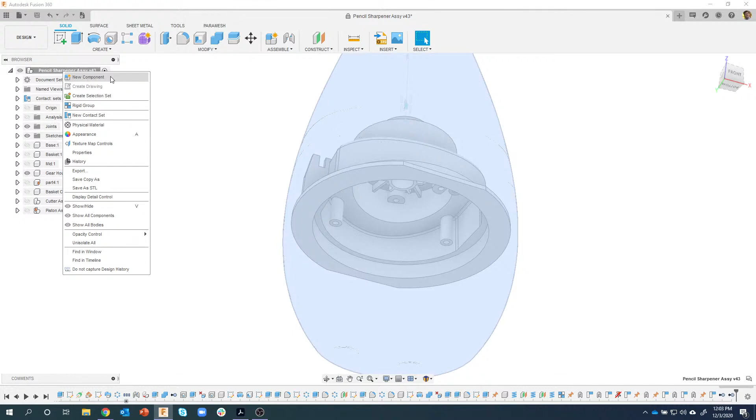We're going to be using information from this, but I want to create a new component. One of the easy ways to do this is to right mouse click in your browser and say new component, and you're going to see me do this a lot today. I like this method because you can tell it where you want that component to go. If I came up here and said new component, I'd have to tell it what's its parent and all this kind of stuff, which can get a little confusing.

So I'm going to just right mouse click here, say new component, and I'm just going to call this motor gear base.

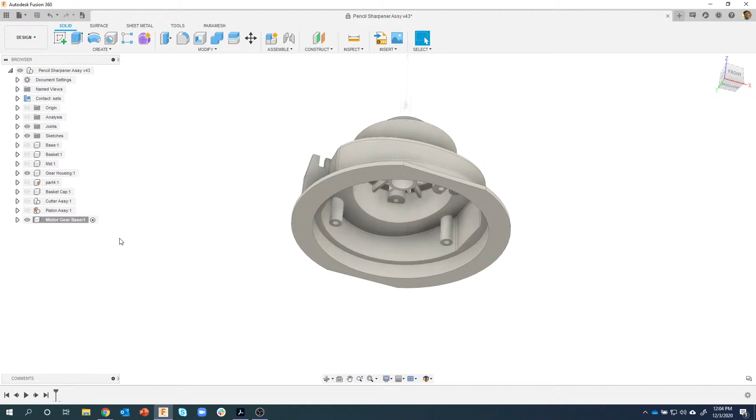Okay, so I now have this component called motor gear base. You can see that it's active, which is great. And then I'm going to create a sketch.

This part kind of butts up against this other gear housing right here, so I'm going to put my sketch right on that face and project - I'll hit P for project. I like to rotate so I can see which edge - there's an edge here and there's an edge here. Does it really matter? Not really, but if I'm looking at it straight on, I have a harder time seeing which edge I'm actually selecting. So I like to rotate slightly, and we're going to project that edge right there. Just a little tip I do.

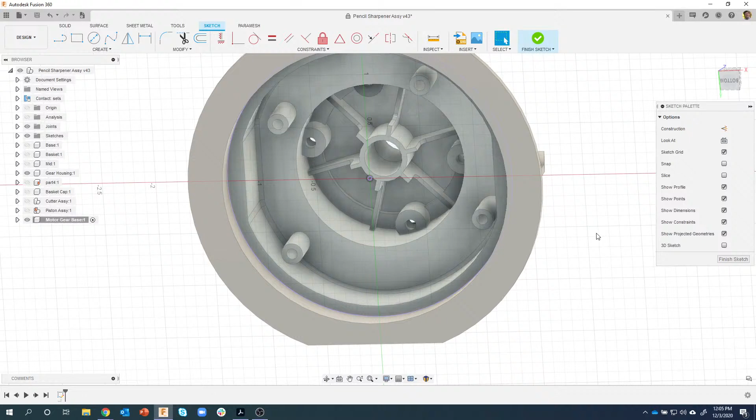Don't need the gear housing in the way anymore. And I now have the edge projected from that gear housing.

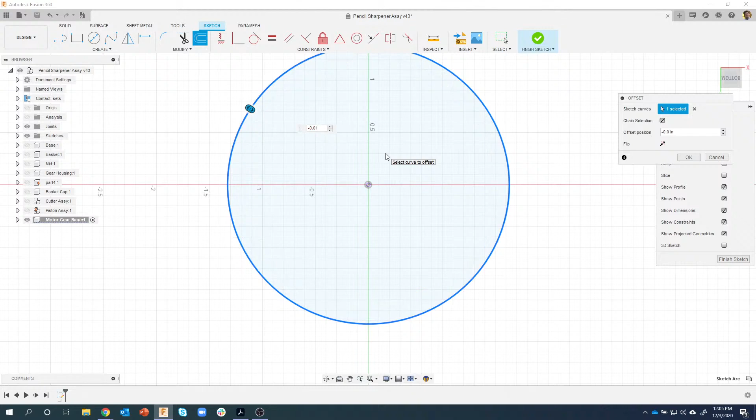We're going to give it a little bit of clearance, so I'm going to use the offset command - the shortcut key is O for offset. I'll click on that edge and drag to see it go in, which is a negative number. That's why I like to drag first, to make sure I put in a negative 0.01. If we zoom up, you'll see there's the projected edge, and there's our new offset edge.

Let's do a circle on this new edge. You'll notice it's going to try to snap to that edge, so I'll get close to that. I want it right here, but since it's not snapping horizontal, I like to over-exaggerate a little, so I'll come up a bit. This is going to be a 0.5 diameter circle, and we can see it's still blue, which means it's not totally constrained.

If I come in here and do a horizontal vertical constraint, I'm going to say I want that point to be horizontal with that point. We can now physically see that it moved into place, it's perfectly horizontal, and it's fully constrained.

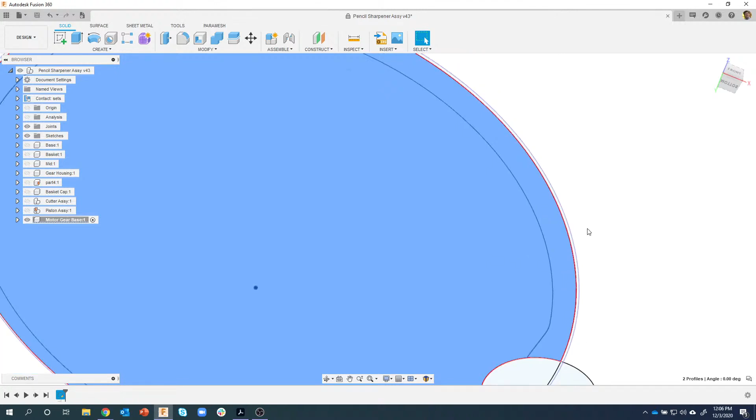Now you'll notice it's projected both the outside and inside edge, so I'm going to make sure I grab both of these profiles. I don't want to grab this little sliver right here because that's what we offset. Now I can say extrude, right mouse click, extrude. I like to start to drag to see what direction, what the number is. In this case it's a positive number, so 0.175.

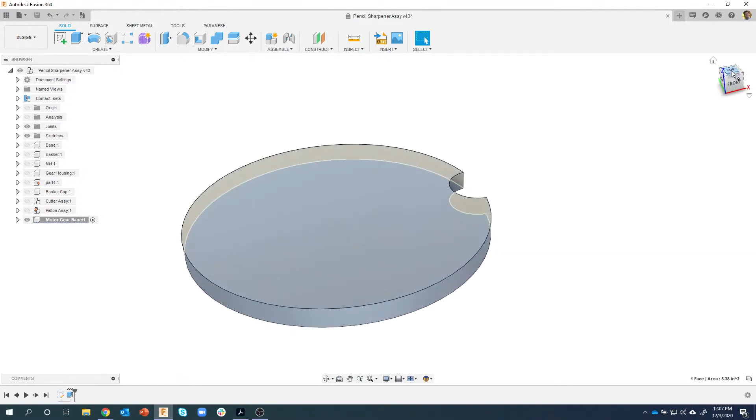It's shelled out, so looking from the bottom of the part, I can use my cube to help me out here. I'm looking up at the bottom of the part. I can right mouse click and say shell. Again, I like to start to drag to visually see what that's going to look like, and then I can give it the thickness. In this case, 0.06.

Again, I got that dimension off of the drawing. Hopefully you're seeing I've hardly ever had to go to the menu across the top, and I really emphasize that in a lot of my live streams. Everything's right at your fingertips - you right mouse click, here's the shell command or the extrude command. The marking menu has the hole command and repeat the last command, etc. You're not having to find which command to use.

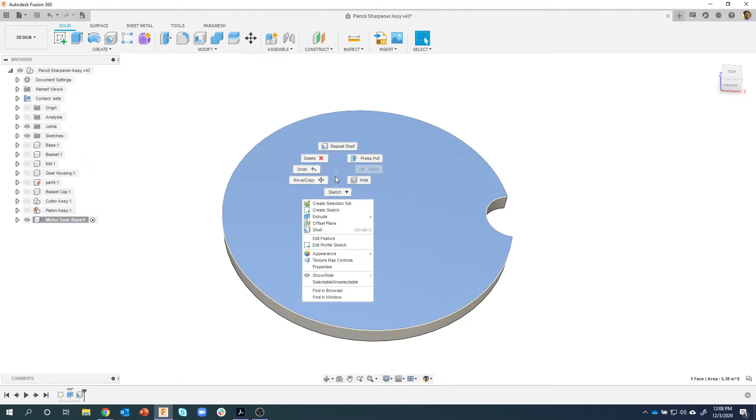Now we're going to start creating some of this geometry that you see on the top, mainly these 4 standoffs. One's kind of hidden right here, but you can see them - those 2 there and those 2 there. Again, we're going to use some existing geometry to help us out. So I'm going to create a sketch on this top face. The gear housing sits on top of this part.

Let's go ahead and turn off our motor gear base. You can see these 4 plastic standoffs are going to be registered into these recessed counterbores on this motor gear base. So what I did is, if I have the motor gear base turned on, you can't really see those standoffs very well. So I went ahead and turned off the body.

I'm going to do P for project, the project command, and then I'm going to project these holes. Now, I like to project the face more than the edge, and the reason for that is, to me, this is like more than just geometry - where this is more just like an edge. So if this geometry were ever to move, so would the projection. So I'm going to go ahead and project those faces.

Now, if I projected the edges, they would probably move also, but again, this is just personal preference - I'm kind of saying these are the faces I want to project. And you'll notice this projection link is turned on. That's really important. What that means is, if the geometry that was used to create the projection were to move or to change, so would the projection.

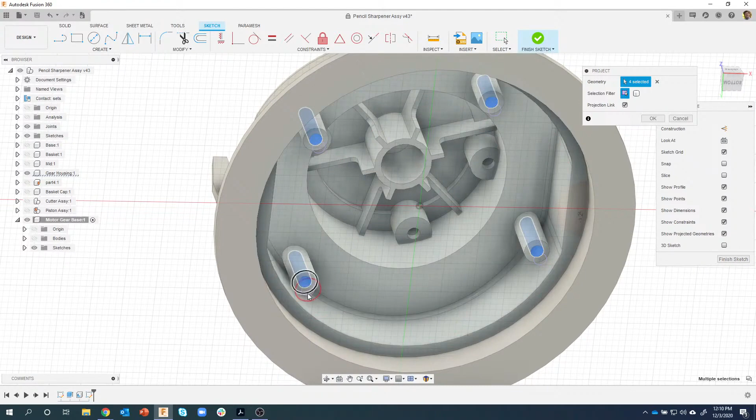And you're going to see this is going to come into play in our next live stream. I'll foreshadow you here - there's going to be some errors that happen once we move forward, and we're going to have to end up moving some of these standoffs, and you're going to see how cool that is next time.

So you can see I projected those faces of those holes, and they projected onto my sketch, so I don't need to see the gear housing anymore. I'll turn this body back on, and I kind of like to look at it from the top. I can tell I'm still in my sketch because of this Finish Sketch button.

And now I'm going to start defining basically the counterbore part. So let's do a circle - it's 0.333 in diameter, so we can kind of see that. Now all 4 of these are going to be the same, so check this out - I'm just going to randomly draw some circles that are obviously centered, but I don't care about what size they are.

Then I can come back and say, I'm going to use this equal constraint - I want this circle and this circle to be equal. And you can see how that changed. Same thing with this one and this one. Now all 4 of these are equal. So if I were to change this to 0.5, for example, all of those would have to change to 0.5.

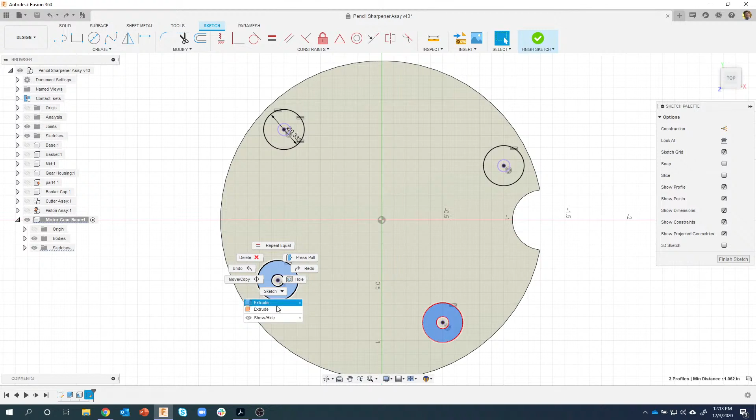Extrude and extrude. People ask all the time, what's the difference between those 2 extrudes? The first one with the blue icon is a solid extrude, and the one with the orange icon is like a face extrude, with no thickness to it. It would extrude just a face. So 99.9% of the time, you're probably going to want to use this blue extrude.

And you'll notice I didn't have to hit Finish Sketch, it just took me into the extrude command. Here you can see it's going to extrude that profile up. Let's do 0.16, again, according to the drawing. And of course, I want this to join to this part. So I'll say OK, and there we go.

Now you'll notice a little issue here. We can't see through the part. We're going to fix that here in just a moment.

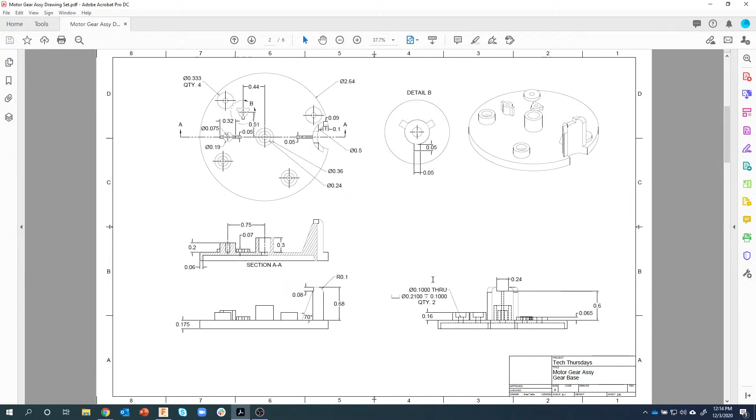So what I'm going to do is create a counterbore hole. Let me jump to the drawing here real quick. And you can see that it's a counterbore hole. Which one is it? It's not cutting through on that section view. Here we go, sorry, in the hidden view. So here you can kind of see the counterbore hole. Let me scroll down slightly.

And this is the new information we just added in the latest release, where if you point to a hole feature, it fills out all of the information for you, which is huge. People have been asking for this for a long time. So we can see that it's a 0.1 diameter hole that goes all the way through with a counterbore diameter of 0.21 and a depth of 0.1. That's what these symbols mean.

So I'm going to use that information. I'm going to create a hole command, and just click somewhere on this face, for example, and it gives me a quick preview. The reason I click off to the side, check this out, I can drag this and you'll see that little white dot appear. That's the center of that circular surface. So I'm going to snap right to that, and it snaps to it.

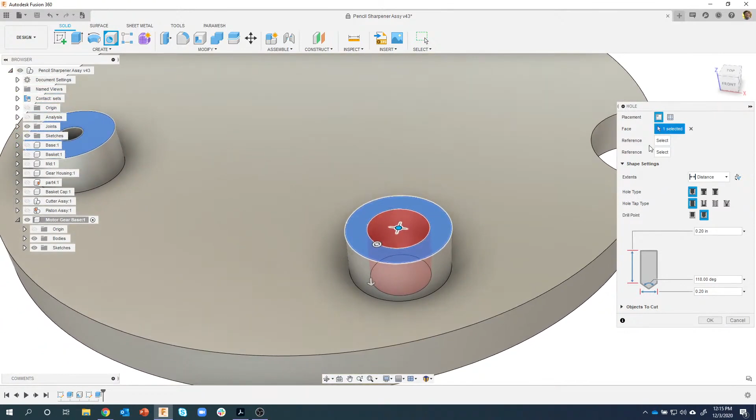Now I can come in and say what type, it's going to be a counterbore hole. What's the extent? I want it to go all the way through, so it's going to cut all the way through. You can see that there.

And then I'm just going to fill in the information. So the hole was 0.1, and the counterbore diameter, according to the drawing, was 0.21 with a depth of 0.1. You can see it's kind of building that counterbore feature for me, and it's going to go all the way through. So we're basically fixing the problem of it not going all the way through. I'll say OK, and there we go.

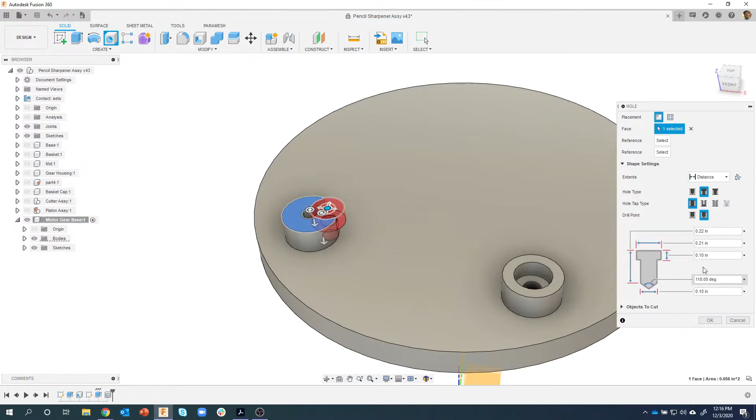We just kind of created this little standoff. I'm going to repeat the last command, just drag, right mouse click and drag straight up. You'll notice that it's remembering my last settings, so if I click on this face, it remembers all of those settings. Except for my extents, it doesn't know if I want to go through all again. So I'll drag to that point and say yes, I want to go through all. And there we go, pretty quick way of doing that.

Now I want to create the other two little bosses. So I'm going to turn this sketch back on, expand, open my sketches, and turn on sketch 2, and there we see those. I'll select that circle and that circle profile, say extrude. According to the drawing, these come up 0.065, and again, I'm going to join.

Now, these don't have a counter bore, so you're going to see we're going to fix this here in just a moment. The next thing I want to do is to create this vertical standoff right here. So we can see two circular diameters, 0.24 and 0.36, and a height of 0.3.

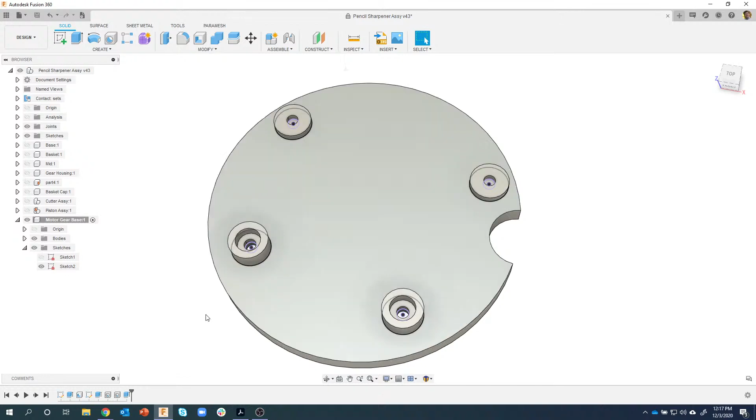Okay, so I'm going to go back and edit this sketch. I don't need to create a sketch every single time for each new feature unless I want to. But in this case, a lot of this stuff is sitting on this face. So instead of creating a whole new sketch, I'm just going to come back here and edit this sketch. Okay.

So I'll go ahead and do a circle at the center. So I hit C for circle. I'll do the 0.24, right click and drag straight up to repeat my last command, which was the circle command. 0.36. Okay. I can click on that feature and say extrude.

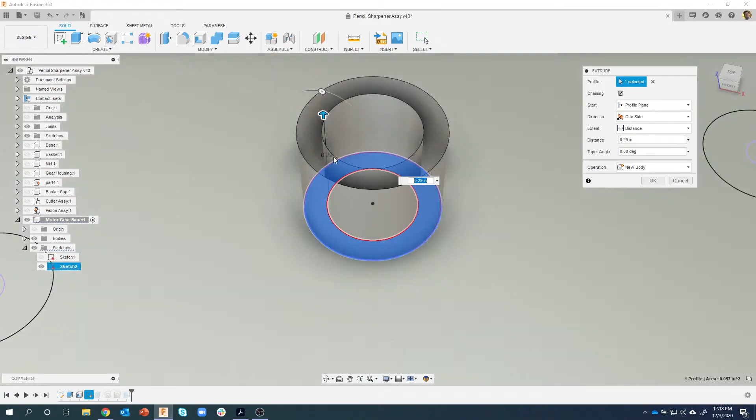Now this time I'm going to do the wrong extrude so you can see what it would look like. So I'm going to say extrude and start to drag up, and you can see they're just like surfaces. They're open. They're not watertight or closed or anything like that. So that's the difference between those two different extrudes. Okay, so we're going to always want to use this blue one.

So I'll start to drag up, and the height according to the drawing was 0.3. Again, it's going to join. I'll say OK. And now what we're going to do is kind of fix those holes. So I want to have a hole that goes through here, and also through here. So I'm going to use the hole command.

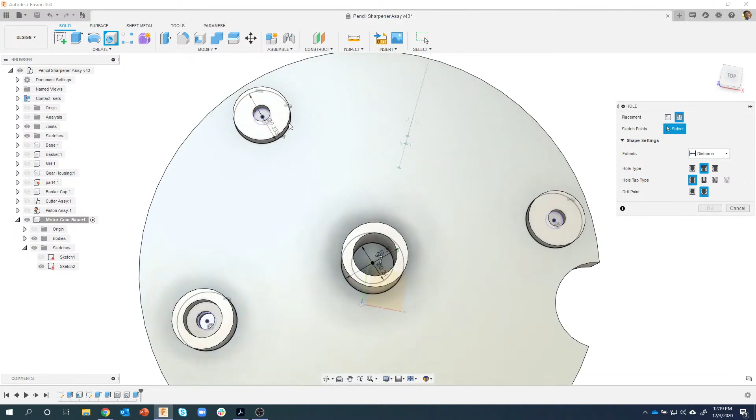Now this time you'll notice it says placement at point, single hole, or it says from sketch, multiple holes. And that's what I want to do. I'm going to do multiple holes at the same time. So I'm going to click on from sketch, and I'll click that point. And you'll notice because my sketch is displayed, even though I'm in 3D, I'm able to pick that point.

And you can see it remembers my last settings. But what I want is just a simple hole that goes all the way through. That's 0.1 in diameter. And if I kind of rotate around, we can see that preview. And what this allows me to do is I can continue picking other points. So I'll pick there, and I'll pick there. And you can see that it's putting a hole all the way through at those 3 points. There we go. Pretty cool.

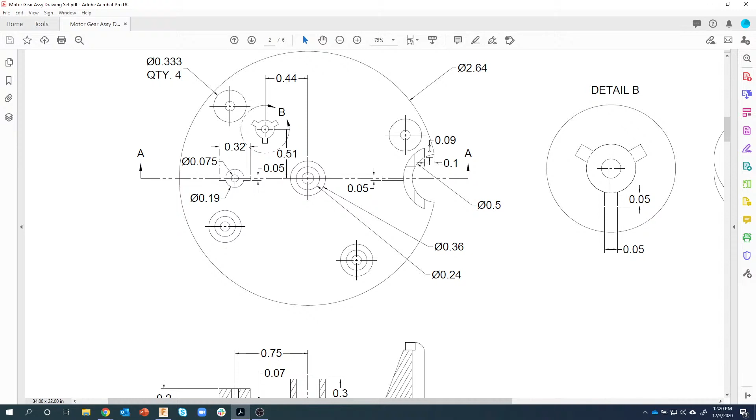So the next thing I want to do is kind of work on this, I guess I would call it an alignment feature. Let me take a look at this. Let's zoom up a couple here. So looking at this part of the drawing, we did an offset of 0.09, and then we brought it back off of the edge of the circle 0.1. Okay, so let's do that, and I think the overall height is 0.68, so all of these dimensions are going to come into play.

So once again, I'm going to edit the sketch. Now you'll notice because I'm going back in time to edit this sketch, you don't see any of the 3D stuff that I've been doing, like all those standoffs and those holes. So that's the only thing you have to keep in mind when you go back and edit a previous sketch. You'll see all of my downstream processes are kind of grayed out. So just keep that in mind. Okay.

So I want to offset this arc. So O for offset. Now you'll notice as I hover over this, it's wanting to do the whole thing. Well, all I really care about is the arc. So I don't want chain selection turned on. Now you'll notice it doesn't chain all the way around, and it lets me pick which line I want. It's giving me a preview. I know that's in the positive direction, so we'll go 0.09 according to the drawing.

Then the next thing according to the drawing was there was like a vertical line. So let's just do a line, and you'll notice as I get near the line, it's going to snap to it. So I'll click there, and then I'm going to come down here, making sure I'm vertical, and it's going to snap to that edge there also. And what's neat about that is if I were to move that line around, it's coincident. You can kind of see it's coincident with that arc. Okay.

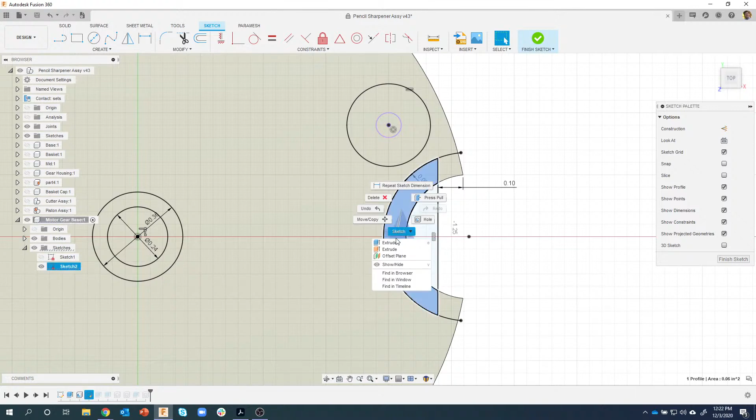I now have the profile that I want. This little section right here, I'll say extrude, start to drag to kind of get a preview of what that would look like. And the overall height is 0.68, and join. So we just created that little offset. In fact, if I turn off the sketch, you can kind of see what that looks like a little bit better. Using existing geometry to help me with the design. Okay.

On the drawing, these two edges are filleted, so I'm going to select those edges, right mouse click and say fillet. Type in the distance of 0.1. I get a nice preview of what that's going to look like.

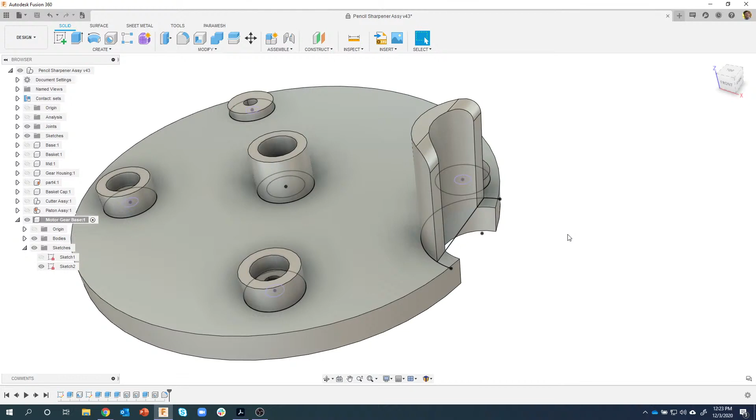One thing you also notice with a lot of my live streams is I kind of do things in order. Like I'm going to finish designing this whole standoff. I don't do one thing over here and then one thing over here and then come back over here, because that kind of helps me with my timeline design. So it makes it a little bit easier to follow.

How is this part being created? So if I look at my drawing, you'll notice there's a little notch at the top of this, and then there's also a rib. You can kind of see this rib right here. Okay, so this notch is 0.8 from the top, or I have a dimension over here, 0.6 from the top of the part. And we can see that it's about 0.24 wide.

So I'm going to show you a neat little trick. I've done this before, but I really like it. It kind of saves having to have multiple sketches. I'm going to come back and edit this sketch. Let's zoom up a little bit. I'm going to create a rectangle, so R for rectangle. And then you'll notice it gives me the 3 different options for the rectangle over here. So I'm going to do a center rectangle.

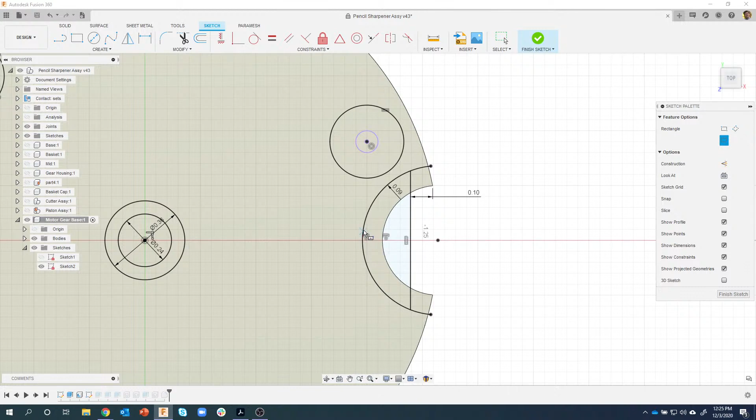If I get near this edge, you can see that it's being coincident with it, but watch what happens when I get here. You can see a different icon appear, and that is the midpoint of this arc. So I just get near that point, and it found the midpoint of it. Now what I care about is the width of this slot. It's supposed to be 0.24, okay? And then I'm just going to type in like 0.5. It doesn't really matter for that. And you can see that that is fully constrained because it found the midpoint of that arc. But really all I care about is the width of this slot.

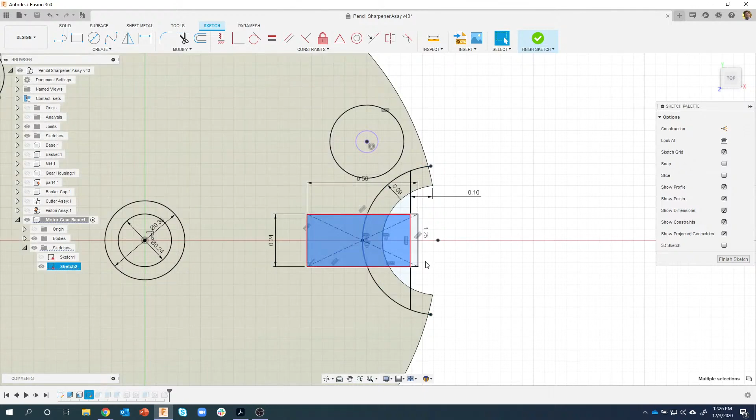I'll go ahead and select, I like to select all of these profiles right here. Honestly, all I really need is this one. But again, what if these walls were slightly tapered? Like if we came back and added a 1 degree draft or whatever, it could cause what I call sliver faces to appear. So I like to overexaggerate and say, I want to machine this whole thing away. You can almost think of it as like a flat end mill is coming in and cutting this whole section. So I'm going to grab that and I'm going to say extrude.

Now notice what happened. Okay, I'm way back here in my timeline. So that little tip I showed you is really useful, but sometimes you'll go to use it and you get this result. And that's because I was editing that sketch and I said, okay, now let's extrude that profile. Okay, so instead, what I would do is, I'm editing this sketch. You can kind of see that here. I'm done with my design. I'm going to say finish sketch. And now you can see it completed all of the steps in my timeline.

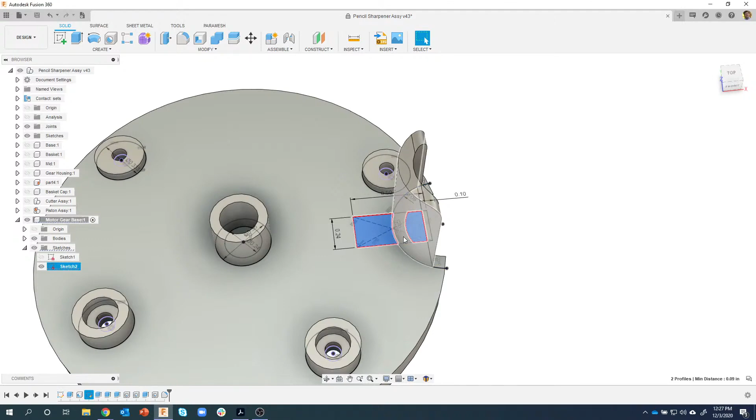Okay, so sometimes that tip is useful and sometimes it won't work depending on what you're machining and all that kind of stuff. It worked fine over here because we were just adding it to extra geometry. Okay, so now I'm going to select these profiles again. Again, I'm just kind of clicking through to select those because they're kind of buried in there. And you're like, well, this is in the wrong location. It needs to be up here. Well, you're correct. I'm going to go ahead and say extrude. And if I were to start to drag, you're going to see that it's going to cut that geometry away.

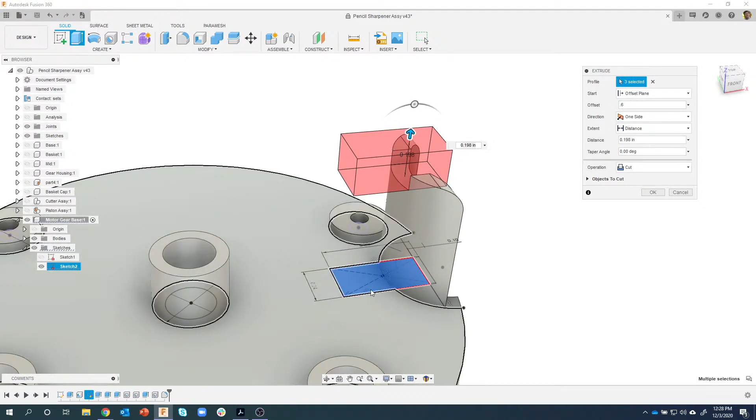Okay. But instead of starting at the profile plane, I'm going to say offset plane. And then according to the drawing, it was 0.6 up. So I'm going to type in 0.6, and now you can see it's taking that profile, starting 0.6 inches up, and then extruding. So again, instead of having to have a sketch on this face here, I was able to reuse the sketch that I have down here, and we're just telling it offset 0.6.

How far? I'm going to say all, or I could say to object. I'm going to say to object, and let's just click on that face there. And if that face were to move up or down, this extrusion cut would have to move up and down also. So there we go. Hopefully that makes sense. It's a pretty useful tool to start your extrusion from a totally different distance.

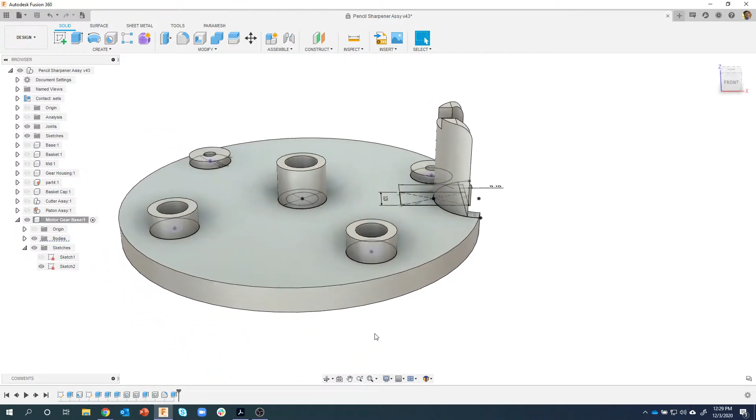Okay. So what I want to do now is, give me a quick second here. I think I need to add the rib. So yeah, let's do that. So I'm going to create a sketch, a new sketch on the front plane, because I like to use the rib command.

So in fact, you know what? I actually made a mistake here. I'm going to finish that sketch, and I'm going to undo. I actually wanted to do the rib before I did this notch. So I'm actually going to drag my timeline back a little bit before that notch. Okay. Then I can come in and create my sketch on this front plane.

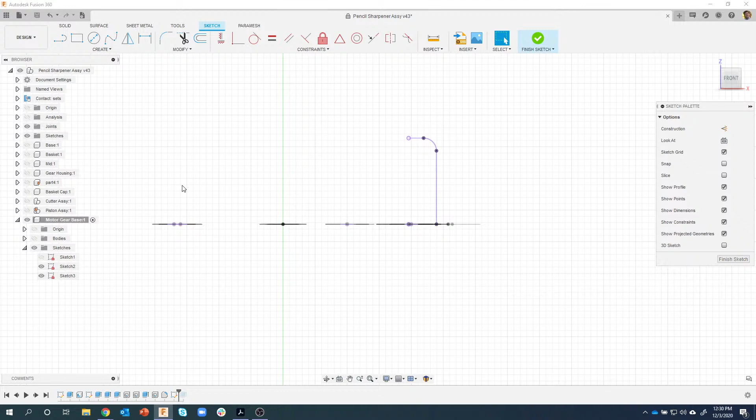And I'm going to project some geometry. Now, I've shown this tip before. If it's a curved surface, you'll notice that when I project that, it doesn't project that curved surface edge. It only projects actual edges. So let me undo. I'm going to do P for project. That's for specified entities. This is for bodies.

So if I click on bodies and then hover over this part, it's going to project almost like what you would think of as a silhouette. So now you'll notice if I turn off the body, it's almost like a silhouette of it, and we see that edge. So that's a really useful tip: if you need to project circular items or cylindrical items, I usually project the body.

Okay, I need to create a line here that's at a very specific location. So I'm going to just draw a construction line. I'm just going to draw a line out here, click on it, and convert it to a construction line. I don't want it to be an object line, but that point is coincident to that edge. So I can move that line up or down. Let's control it with a dimension. That is supposed to be down 0.08. You can see that that's now moved. And now I have a point I can catch to.

I'll go from there. Now I need to be really careful. If I get right here, it's going to snap to the middle, and I don't want it to be constrained like that. So I'm going to get to this edge and click so it's on that edge. And then I will throw a dimension from this edge to this edge. And you'll notice if I just click one edge, it wants to do a linear dimension, but by selecting a different edge, it now lets me type in an angle of 70 degrees. And watch what happens when I hit enter. It's going to pivot around that point, and it's going to move this point to make that line be 70 degrees.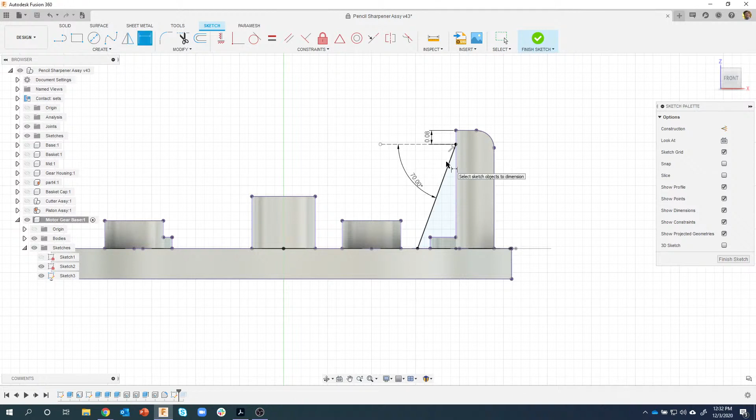I'll finish my sketch, and I now have just a line that we know is touching this outside surface right here, and it's touching this top surface right here. This will allow me to use the rib command. So I'm going to say rib. What's the curve? That's the curve. Again, I like to start to drag to get a preview, and you're like, whoa, that looks really weird. Well, right here, flip direction. So I'm going to flip the direction, and now I get a preview.

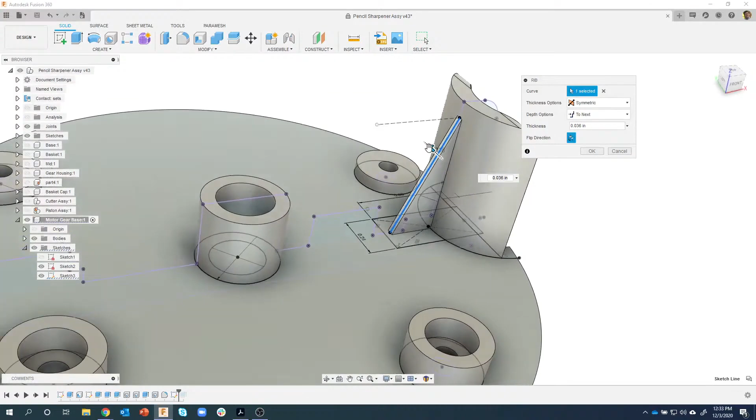And you can see, this is the reason I like using that rib command. It's smart enough to wrap around this curved surface. According to the drawing, it's 0.05 in width. I'll say OK, and I now have that rib.

Okay, and then this is where I kind of messed up. According to my outline, I was supposed to do the rib first, and then I was supposed to come in and do this rectangle, but I got too excited showing you this cool extrude offset command. Well, now I can just go forward one step, and there is my notch. It's still using that profile, and we're good to go. So it's pretty cool. If you make a mistake or you kind of want to reorder things, you can just do that in the timeline.

Okay, where are we at? So the next thing we are going to do is to start creating these. Let me bring up my drawing here. These little ribbed standoffs. This is where the gears are going to end up being located.

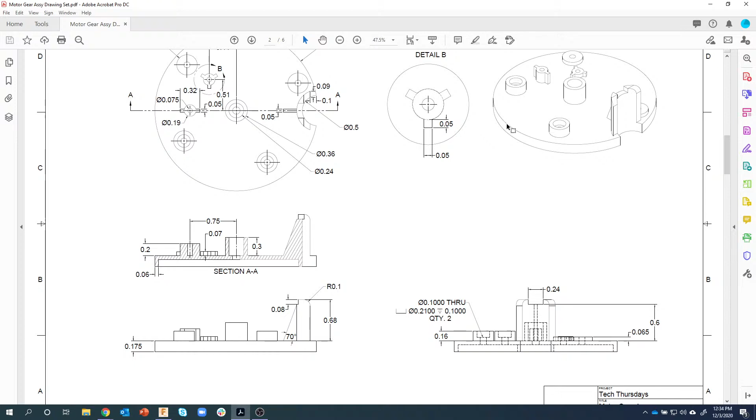And we can see, let me scroll up a little bit. Sorry, too far. We got some locations of where they are, some widths, etc. Again, I'm just referencing this drawing. You can see I did a detail of this ribbed part. So just going to use the information from the drawing to create these ribs.

So going back to my sketch one more time, I'm going to edit that sketch, and I'm going to start by creating the circles somewhere over here. So let's do the 0.075. I'll drag straight up to repeat my last command. This one is 0.19. Let's zoom up on that a little bit.

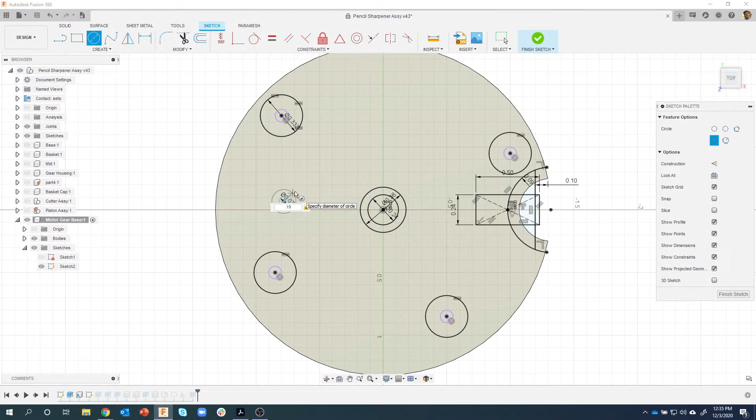And then I'm going to create a rectangle to kind of define the rib. So I'm going to do rectangle, center rectangle. And you can see how it's going to allow me to create a rectangle that's centered on those circles. The correct width is 0.05, or I should say the height of it. And the length of these are going to be 0.32. And there is that guy.

Now you'll notice it is not fully constrained. I want it to be in line with this, so I'm going to do a horizontal constraint, that point there with that point there, and we can see it drop down. But again, it's still not fully constrained. So let's throw a dimension from that point there to that point there, and it needs to be 0.75. I was pretty close, but now when I type in 0.75, you can see that the lines change color.

That's fully constrained, which is good, right? We want to try and fully constrain our sketches as much as possible. Well, while I'm here, I'm going to go ahead and create the other 3 rib standoffs. Now, I know that the circles are the exact same size, so I'm going to just randomly draw a couple circles, like so.

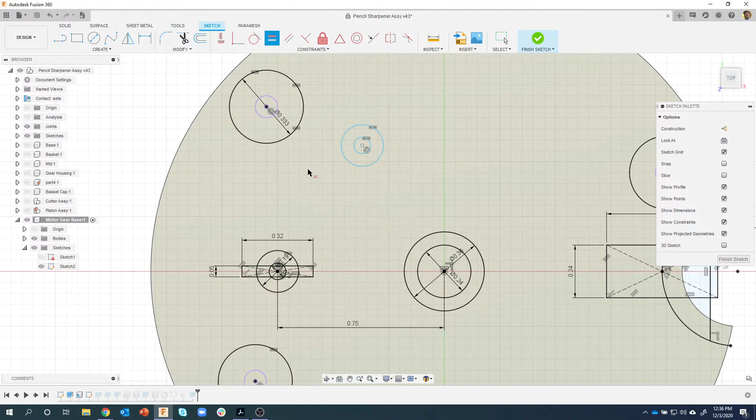I'll use the equal constraint. I want that circle and that small circle to be the same, that circle and that circle to be the same. So I now know if I were to change one of these, they both would update. Now I'm going to use a rectangle to create the ribs. We're going to do it a little bit different.

I'm going to say rectangle, center rectangle, and I'm going to get near the edge. Now I want it to be perfectly straight up and down, but you can see that it's not snapping to that. So I'm going to do it off to the side a little bit, again, just for visual confirmation. The width is 0.05, and the height is 0.1. Okay. Now I'll constrain that. That point is vertical with that point, and you can see how that moved over.

Now I want 3 of these, so I'm going to use the circular pattern command. Now I talk a lot about, I like to do my patterns in 3D to kind of simplify my design, but in this case here I could do either. And I'm actually going to do it in 2D. So what are the objects? I'm just going to draw a small selection box around this rectangle.

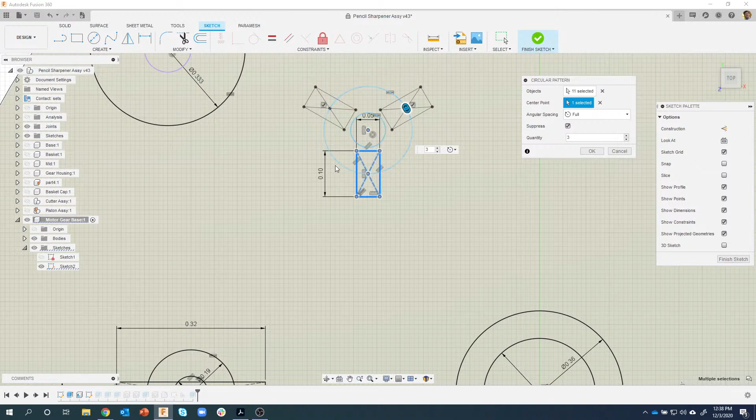What's my center point? It's going to be that point there. And by default, it defaults to 3. But you could see I could do 4, I could do 2. I could have done this one like this. But you can see by doing it 3, there are 3 equally spaced rectangles, and I'll say OK.

Now they're still not fully constrained, so I probably need to dimension this. So I'm going to go from that point there to that point there. Now you'll notice it's wanting to do like an angular dimension. Well, I want it to be a horizontal dimension. Now there's 2 ways you can do this. If you move around, you'll see it'll kind of change depending on where your cursor is. You can see you can change, is it a vertical, an aligned, or a horizontal dimension, okay?

Or you can right mouse click and force it to be a vertical dimension, a horizontal dimension, etc. So I'm going to say horizontal, and that is supposed to be 0.44. So you can see that moved over.

I'll do the same thing. I'll say that point to that point. It kind of wants to do an aligned. Well, let's force it to be a vertical dimension. And it's supposed to be 0.51. And we can see that that's fully constrained.

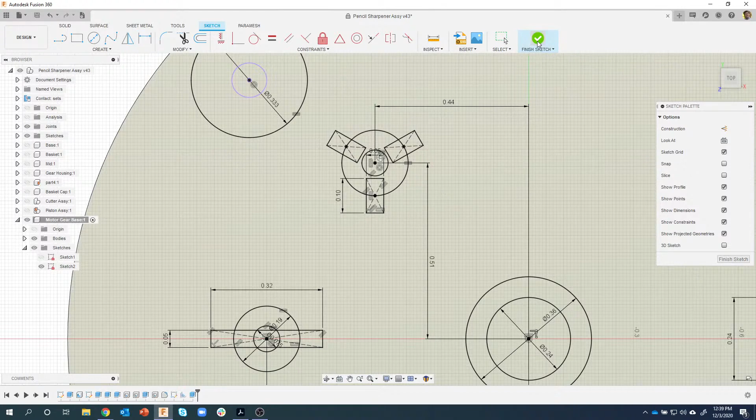I'll finish my sketch, and there are the rest of my 3D geometry, right? Because I said finish sketch, it went down the timeline, finished everything. And now I can go ahead and extrude these guys. So I'm going to just draw a selection box around that profile. But you'll notice it selected some profiles that I don't want. So I'm going to control select those out of there.

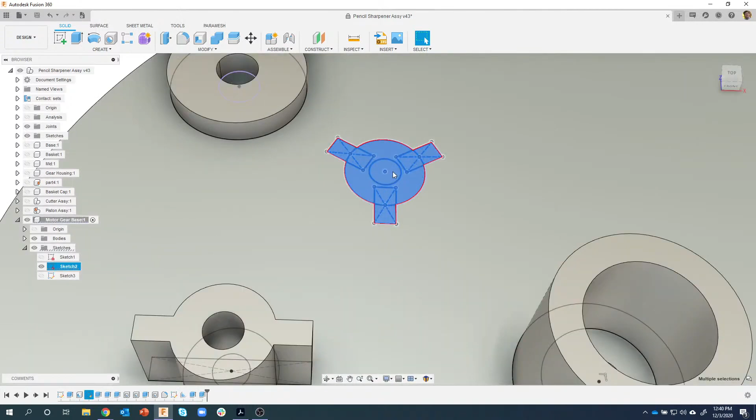I'll say extrude. How far? 0.2 according to the drawing. And then I'm going to do the same thing here. I'm just going to draw a selection box. I'll unselect the, oops, let me do that again. Unselect that guy. Say extrude. This is 0.07 up. Okay.

Doing pretty good here. So we now have created kind of the main geometry of this motor gear base according to the drawing. So we now have something that looks like this. So the next thing we're going to do is start creating some of the other components, and you'll see, let me zoom out here. We've got a component called long shaft at 0.75 tall. We have short shaft, which is 0.63 tall. So that's what we're going to be creating next.

Okay, so check this out. This is what I was talking about earlier. So I'm going to activate this top level assembly. In fact, I don't even need to activate it. Let me just right mouse click on it and say new component. Okay. And what it's going to do is it's going to create a new component at the same level as this.

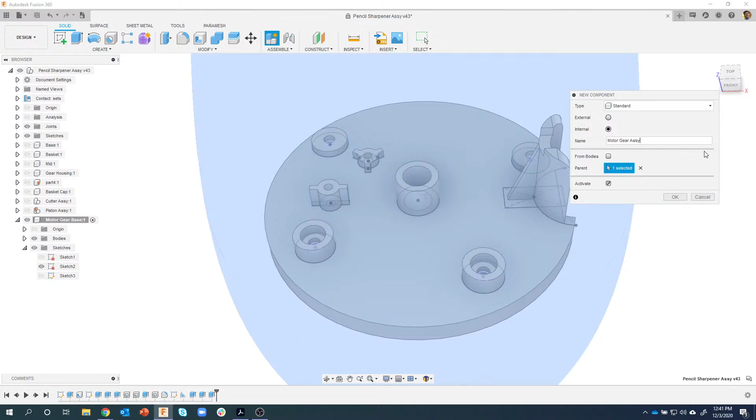So you can see we started by creating one called motor gear base. Well, now I know I'm going to be creating multiple components. So I'm going to call this motor gear assembly. And I'll say OK. And you can see we now have a new component called motor gear assembly. Well, I want this gear base to be inside of that. So I'm going to just drag that gear base and drop it onto my gear assembly. And now, if I expand this open, we can see inside of this assembly, we have motor gear base.

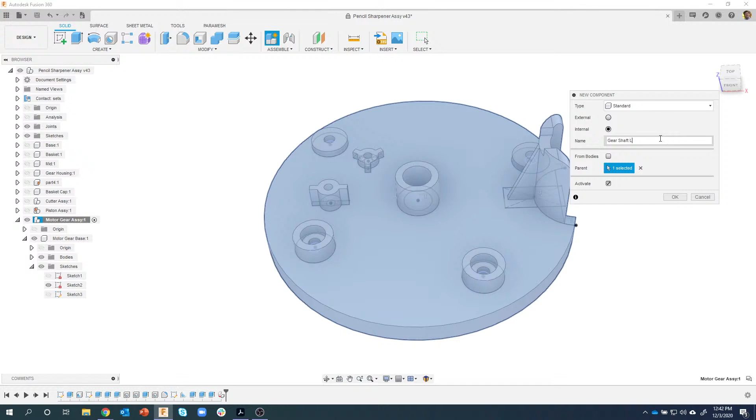And if I right mouse click here and say new component, I'll give it a name. Let's see what we want to call it. Gear shaft. I'll call it gear shaft long. Watch what happens when I say OK. It put it inside this assembly. And again, this is why I really like using this new component here. It allows me to put it pretty much wherever I want. And you'll notice that the gear shaft long is active.

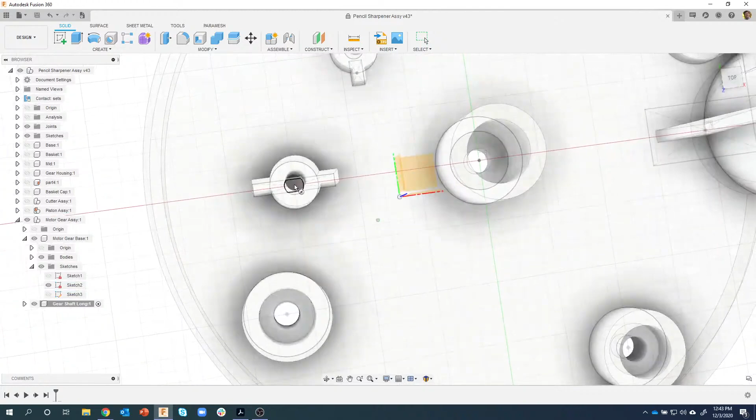Because it's just a cylinder, I'm going to kind of speed things up here. I'm just going to use a cylinder primitive. Now I know it's going to sit on top of this face. Now some of you might say, why don't you just create it right where it belongs? I could, but I like to create it out here in space and then use a joint command to put it where it needs to be. And that way, if anything were to change, that joint command would have to update also.

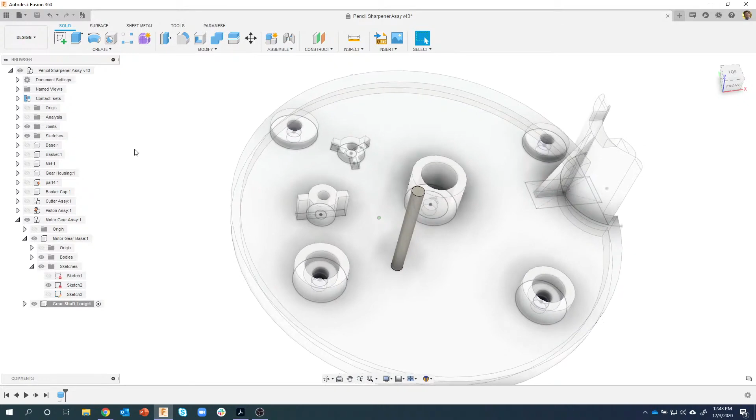So I'm just going to click somewhere on this face, type in the diameter of 0.075, type in the height of 0.75, and that's how quickly I was able to create that gear shaft. Now, like I said, I want to put this in the correct location. So I'm going to activate my motor gear assembly. Okay. I'll create a joint. I'm going to check my motion is set to rigid, which is what I want it to be.

So which one do I want to move and where do I want to move it to? Well, this is the one I want to move. So you can see I'm getting near that edge right there and go ahead and click. Where do I want it to go? I want it to go near this edge here. In fact, I might even turn the sketches off, making sure I'm grabbing actual geometry. So I'm going to zoom out so you can see what's going to happen here. I'm going to click there and you'll see that that gear shaft moves into place.

And it's a rigid joint. We can see that with that little icon right there. Okay, I'm going to do that again. Right mouse click, new component. We'll call this gear shaft short.

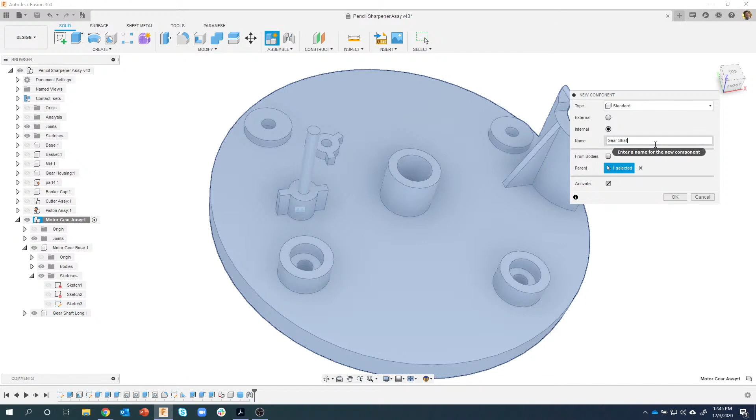It becomes active. I'll do my primitive somewhere on that face, 0.075. And then the overall height is going to be 0.63. It's a little bit shorter.

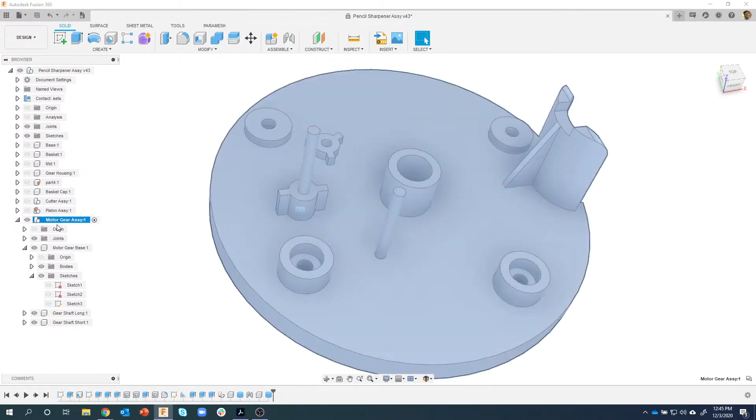Now you might ask, why did I activate this assembly? Well, notice when I created that joint, it put it underneath that assembly instead of underneath the individual component itself. Again, it's kind of an organizational thing. I find it a little bit easier to kind of have the joints at the top level of the assembly. So that's why I activate that.

In fact, if I expand this open, you'll see there's the one rigid. We'll come in here, we'll grab that guy and that guy. It'll slide it over. We'll say OK. And now you'll see those are the two rigid joints.

And remember, you can rename these. So I could call it gear shaft 1, rigid, or whatever. So you can rename these if you want to.

Okay, so now we have some place to put some gears, and that's what we're gonna do next. We got about 15 minutes left. We might go over. I know I say that every single time.

So I'm gonna use the FM Gears plugin. Now we've used this previously. If you don't have this, you can go into the Tools menu and then go to Add-ins, App Store, and just search for FM Tools. Okay, so that's what we're going to use, or FM Gears. So I'm going to say FM Gears.

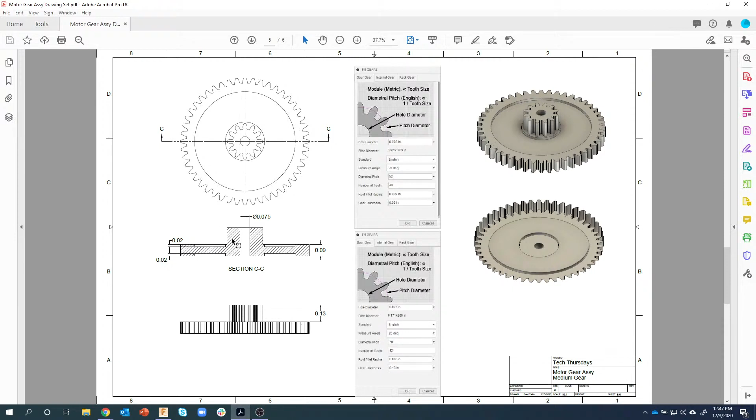You can do internal gears or spur gears. Now we want to do spur gears. Okay, and in the drawing, if I jump over here and scroll down, I've included little screenshots of the settings that I used. And then you'll notice we're going to modify these gears. In fact, these are actually two gears that we've combined into one. So that's kind of cool to make it look like this gear you see there.

Okay, so the hole diameter is, according to the drawing, 0.075. Diametral pitch for this one is going to be 52. The number of teeth is going to be 48. My fillet radius is 0.009. And then my thickness is 0.09. I'm going to zoom out so you can see what happens here.

I'm going to go ahead and say OK. And it's going to take a second, and it's going to create this gear. And you'll notice that it's actually created a new component called spur gear, and it says 48 teeth.

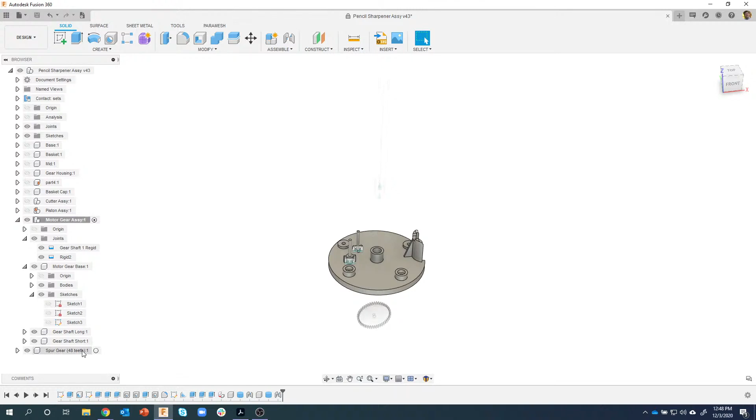Well, now I want to modify this. So I'm going to make sure I activate that component. And now we can see, sure enough, everything else is ghosted out. This is my active component. I can expand it open. We can see the sketches, etc.

And what I want to do, let me see if I can turn on my camera here real quick. I don't know if you can see it. Whoops. Can't see it really well.

So I'm going to click on this face, create sketch. And you'll notice, because this is active, this is where my sketches are being created. If I scroll down, there's my new sketch.

And I'm just going to use the circle command to create a couple profiles. So let's do 0.3 and repeat my last command. I love that tip of just right-clicking and dragging straight up to repeat your last command. So there's the two circles.

I'll click on this face and say extrude. Let's zoom up here a little bit so you can see what's going on. Well, I want to cut into the model so you can kind of see. It gives me a nice preview what that's going to look like.

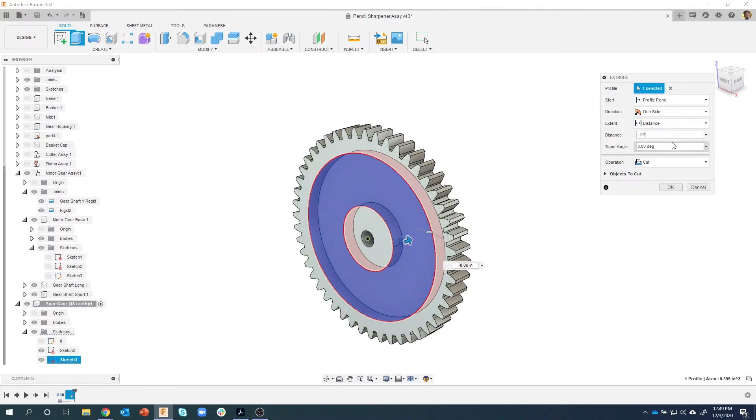So that's in the negative direction. So I'm going to say minus 0.02. It's going to cut. I'll say OK. Now you'll notice that sketch turned off.

Well, I want to do the exact same thing on the other side. Well, I could mirror that extrude feature, but then I'd have to have a mid-plane and all this kind of stuff. It would take a couple more steps. Well, instead, I'm going to turn that sketch back on.

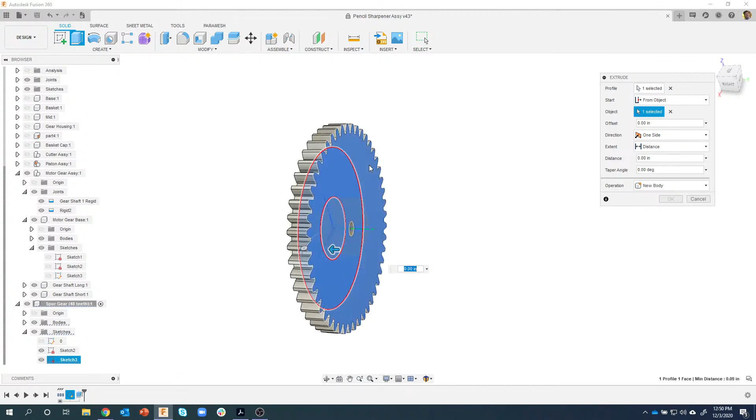I'm going to select that profile again, and I'm going to say extrude. But this time, where's the start? I'm going to say from object. Last time we said offset plane and we typed in a distance. Well, I don't even remember what the thickness of this gear is, so I'd have to know that for that option there. But if I say from object and I click on this face, it is now going to extrude from that face.

And I obviously want to go in this direction, which in this case is going to be positive. So I'll say 0.02. I'll say OK. And we used the same sketch to modify both sides.

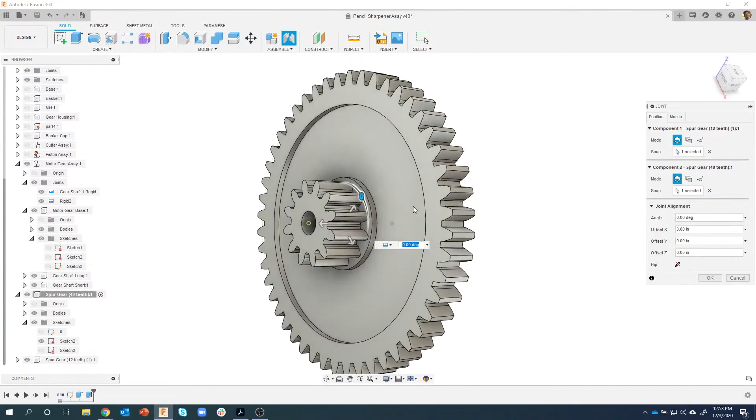Now you can see there's the 12 tooth, there's the 48 tooth. I want to position this in the correct location, so I'm going to say joint. Let's just grab this edge, and then I'm going to grab this larger circular edge here, and you'll see it move that smaller gear in the correct location. I'll say OK.

Now I actually want these to be, instead of 2 gears, 1 gear, so I'm going to say combine. What's my target? I'm going to pick this larger gear as my target. What's the tool? I'm going to say that is the tool, and I want to join them together. Now I don't want to keep my tools - if I had this checked, it would join them together but also keep this gear as a separate component. I don't want that, I basically just want these joined together. I'll say OK, and we can see if we turn this body on or off, it's all one component.

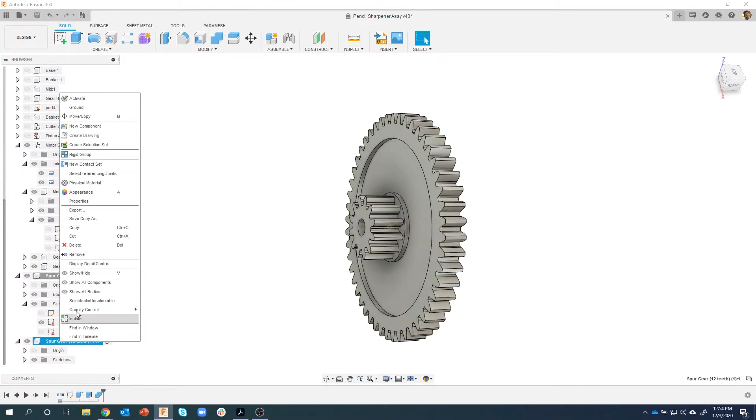So now you'll notice in my timeline I have this spur gear, but it's basically empty, there's really nothing in it. There's no body in it anymore because we basically combined it with this guy. So I'm going to just right mouse click on it and say remove, I don't want that to be in my design anymore. So you can see it no longer shows up.

Let's zoom out a little bit. Now I want to start positioning this gear in place. So once again, I'm going to activate my motor gear assembly, and we're going to create a joint.

In this case, I obviously want it to be a revolute joint, so I'm going to say revolute. What's the first position or the first component? I'm just going to grab, I could grab either this outside edge or this edge here, doesn't really matter. And then I want to put this on this lower standoff, so I'm going to click right there, and you'll see it instantly puts that part, and it kind of gives me a preview of what that's going to look like. I'll say OK, and there's my part.

Now if I try and rotate it, you'll notice it doesn't let me, and that is because you need to ground an object - an object needs to be stationary. That's going to be this motor gear base, so I'm going to right click on it and say ground. Before I do that, you'll notice if I just drag on it, it moves around, right? But as soon as I come in here and say ground, I can no longer click and drag on that motor gear base. There's a little pin icon right there that says it's grounded. But now if I grab my gear, you can see that sure enough I can rotate that.

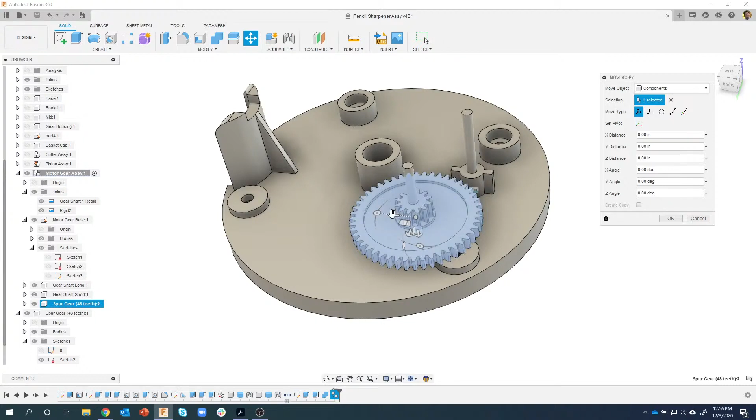I'm going to right click on my spur gear and say copy. Now I want it to be inside my motor gear assembly, so I'm going to right click on my motor gear assembly and say paste. Now when it does that, it puts it in the exact same location. So I'm going to drag this off to the side a little bit and just say OK, and now you'll notice that we have two separate gears.

Now you might be saying, well, why is this one ghosted out? Well, that's this spur gear right here, and you'll notice that it's not inside my motor gear assembly. But I can just click and drag, like so, and now it's inside my assembly. Pretty cool trick. Now the reason it wasn't, it created it kind of at the top level when I used that FM gears, and then I needed to put it inside my motor gear assembly.

Okay, pretty much the same thing. We're going to create a joint. I'm going to click on this bottom edge. Now be careful when you're grabbing this edge. You'll notice that it's grabbing this edge and the center of it. That looks good, but every edge has a start and an end point, and you'll notice right here is where it is. And if I were to click right there, I would get a really weird result. So make sure you're getting the result you want, which is the center of that edge.

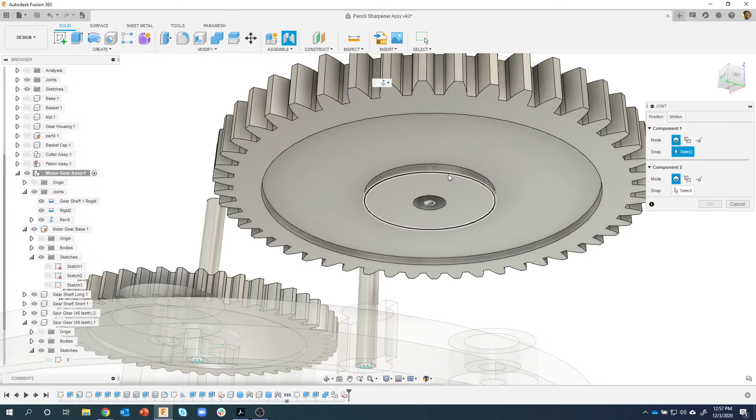And the same thing here. I'll click there. We can see it's rotating. It's standing on top of that guy. It's meshing with that. But if I look at it from the top, you'll notice that these teeth aren't engaged correctly. But what's cool is I can come in here in the joint command and rotate the angle to get something a little bit better.

So it looks like around 5 is pretty good. So I'm going to type in like 5. That's a little bit too much, so let's do 5.5. And again, this is kind of trial and error. 5.4 maybe or something. That looks pretty good. That looks pretty centered, right? So I'm going to create this revolute joint, and it's going to start at the angle of 5.4.

Okay, now if I were to rotate this gear, you'll notice it rotates, but nothing happens with that other gear. So we are going to create a motion link to link these two together. Okay, give me just a second here.

Kind of looking at my outline, making sure I'm doing this in the order that I want. Actually, I guess I do the motion links at the end, so I apologize. I'm going to create the third gear here, and then we're going to do the motion links.

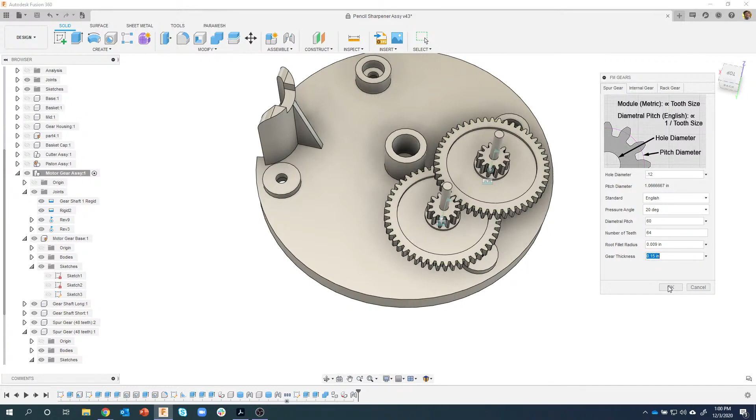And again, this is in the drawing. In fact, let's jump to that gear. So now we're creating this gear. You'll notice there's a little recessed notch in there, but these are the numbers right here. You can zoom up on them to read them.

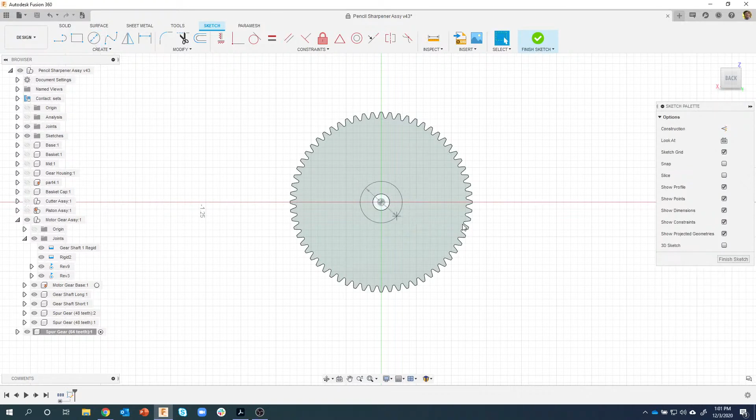Okay, so it created that gear for me. I'm going to activate it to make sure it's the active gear. I'm going to go ahead and minimize some of this so you can kind of see a little bit better. Okay, I want to pretty much do like what we did on the last gear, pretty repetitive, so I'm going to kind of speed this up a little bit. I'm going to create a circle that's 0.35 and 1. So there's one circle and diameter of 1.

Finish my sketch. We'll extrude into the part minus, I think it's 0.02, I'm sorry, yeah, 0.05 in this case, according to the drawing. So we just created that guy.

I'll expand open the sketches and turn that sketch back on. Just like we did before, I'll extrude from object. We'll click on this back face. Now, you'll notice it's also trying to click like edges and stuff like that. So make sure it's grabbing the actual face. You might have to move around. So I'm going to click on that face there. Say 0.05. It's going to cut into the part like so. I'll say OK.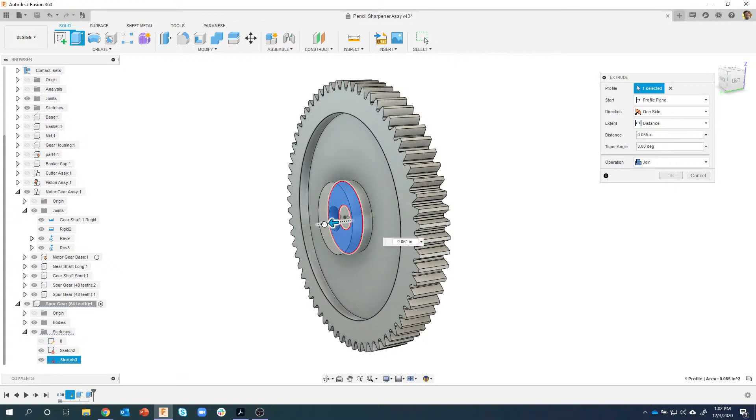I need to add some extra geometry here. So I'm just going to click on that face and say extrude. And you'll see it's going to allow me to create a taller pin. In this case, just a distance of 0.1. Let me turn off that sketch. So you can see it originally was at this plane right here, and we just added another 0.1 to that. And that is right here. Okay.

Then we're going to create that little notch on there. So I do need to create a new sketch. So I'm going to click on that face and say create sketch. I'll draw a circle, again, just referencing the drawing. It's 0.25 in diameter. I'm going to create a center rectangle. The width is what's really important here, so that's 0.17. And I'm just going to come out here into space somewhere. It doesn't really matter where. I'm just going to click.

Now you'll notice I didn't type in a dimension, but these lines are not constrained. Well, I want them to be tangent to this circle. So I'll just come in here and say tangent. I want that line to be tangent to that circle. And because it's symmetric, it did it on both sides. And we can see that we are totally fully constrained.

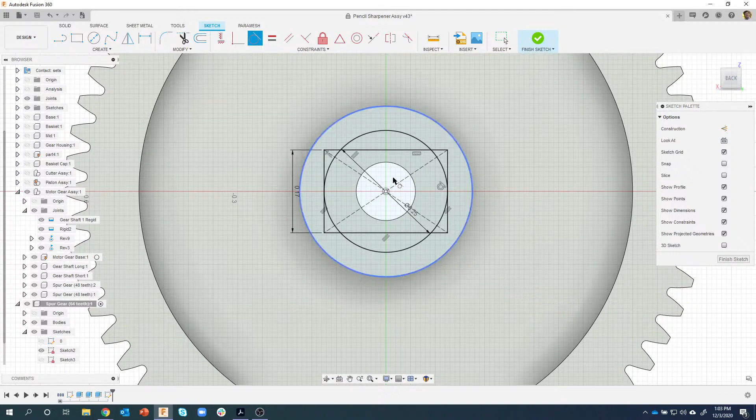Now I have this cool profile where it's kind of chopped off at the top and the bottom. I can extrude in. So in this case, it's minus 0.15. Oops, 0.15. And there's a shaft that's going to fit down into here that's kind of registered by this notch. Okay.

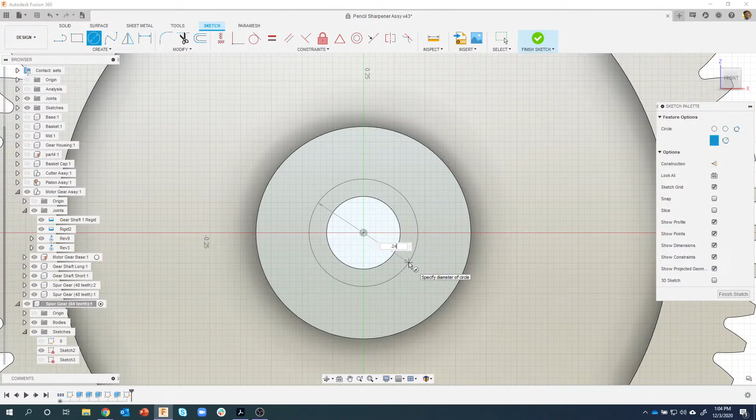Almost done here. I'm going to edit this guy and create a sketch, create a circular profile of 0.24, and extrude that 0.1. So it has a little standoff also. And again, all of this was from the drawing. So there's that 0.1 right there that we just created, the 0.24. So you can kind of see what it looks like when it's all said and done.

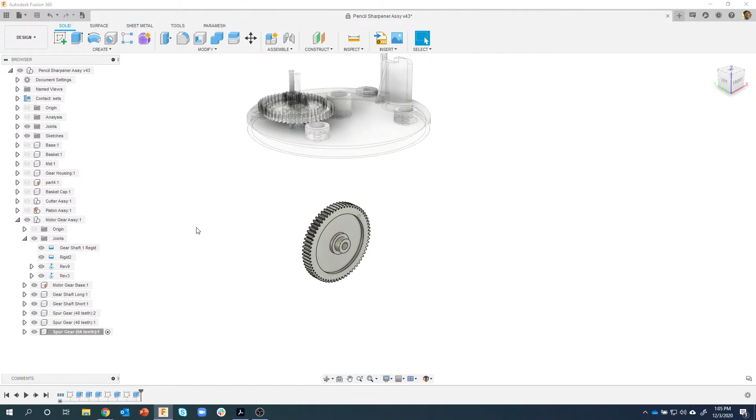Okay, so we obviously want to position this guy. Now, just like before, it's outside of my motor gear assembly. So I'm just going to click and drag and drop it on my motor gear assembly. Let's go ahead and activate my motor gear assembly, and we can see that those are all three of our gears now. 1, 2, and 3 are part of this assembly.

I want to position it in place, so I'm going to say joint, making sure it's a revolute joint, and I'm going to grab this edge here because this kind of sits down inside that standoff. So I'm going to grab that edge and that edge. Now you'll notice it doesn't look correct. It's actually like flipped over. So I'm going to hit this little flip icon, and now it looks better. So you can actually flip the orientation using that flip icon.

And just like I did before, I'm going to take a look at this, and I can see that these teeth, they're engaged down here good, but they're not engaged here. So I'm going to just kind of drag slightly to get pretty close. So it looks like around minus 395. So let's just try minus 395. Okay. Let's try 385. That looks pretty good. So again, it's trial and error. Doesn't really matter because now we're going to create these relationships between these gears.

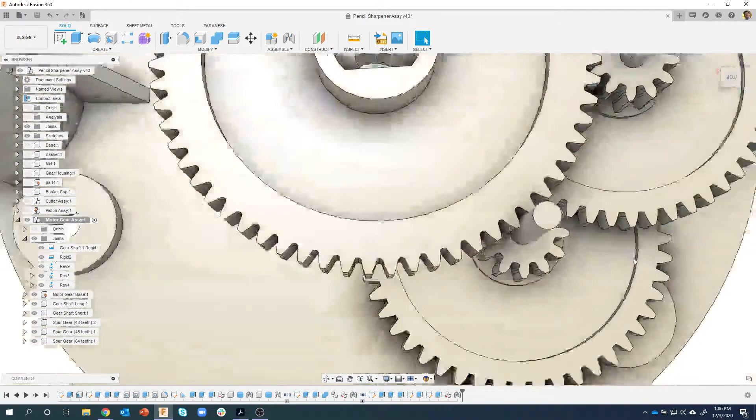So what we're going to do is, if I grab on any of these gears, you can see that one rotates, and this guy rotates. Okay. What I want to have happen, in next live stream, we're going to have a little motor that has a gear on it that's actually going to drive all of this stuff. So I want to create relationships between these.

And under the Assemble menu, there's something called a motion link. So I'm going to say motion link. Now, what are the joints? So I'm going to say this first joint here to this second joint here. And now you'll notice when I click on it, they start to rotate and stuff, and it's kind of hard to see what's going on.

I'll stop the animation, but basically, I'll leave it running. What it's saying is for every revolution of this gear of 360 degrees, this gear has to revolve 360 degrees. But obviously, this one's smaller. So for every 360 degrees that this rotates, this guy is not going to have to rotate 360 degrees. In fact, I'm going to say 90.

And watch what happens when I say 90. And I'll say OK. We'll come back to this in just a second. But watch when I drag this now. So the first thing I see is it's going the wrong direction. Okay? So let's edit that motion link and hit reverse. I'll say OK, and now when I drag this, we can see that that is engaging correctly.

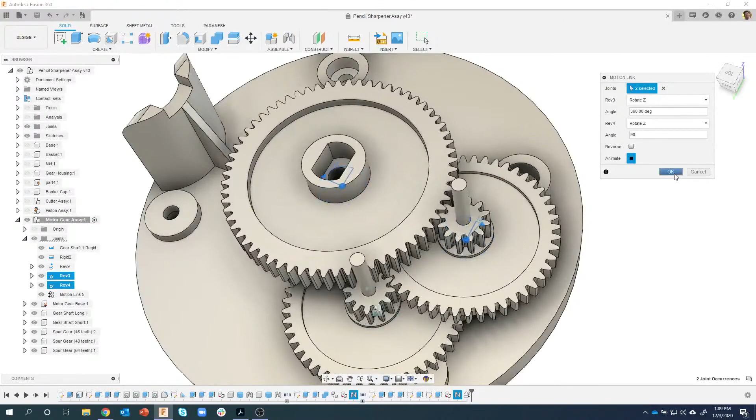Let's now link this one to this one. Now this is a larger gear, so it's not going to be as simple as 90 degrees. So I'm going to say motion link, that revolute with that revolute. And so for every 360 degrees this revolves, this guy is going to revolve, and I'll show you the trial and error. Let's say 90, okay? I'm just going to start there. I'll say OK, and I'll start to rotate, and again, I can see that it's going in the wrong direction.

So let's edit this, say reverse, I'll say OK, and I'll start to rotate, and I can see that it's rotating too fast and the teeth are not staying engaged. So I need to lower that number, right? So that's basically what I did. So we started at 90. Let's try 45. As I start to rotate, now I can see that's too slow, okay? So that's kind of the process that I did.

So let's meet somewhere in the middle. I'm just going to say 65. Let's look at it from the top. And I'll start to rotate. And that's looking pretty good, but I can see it's still just ever so slightly slow. Now it's starting to disengage, right? So again, I wish I knew how to do the math. I used to know back in the college days.

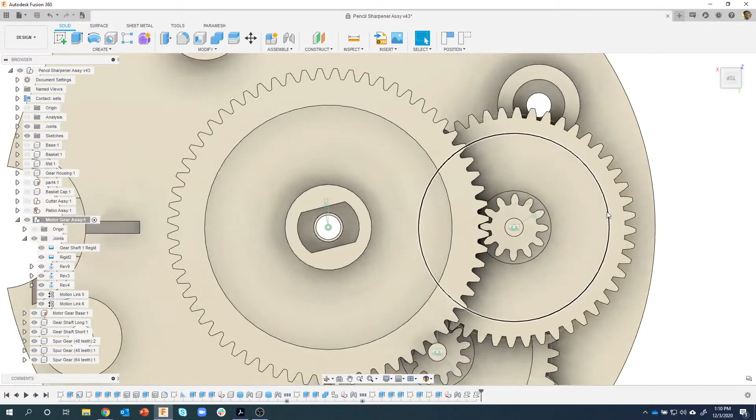So I'm going to make that number just a little bit bigger, and I'm going to say 67.5 in this case. And I'm going to start to rotate, and we can see that sure enough, that number seems to work perfectly. So I went to 67. It was ever so slightly off, so I did the 67.5, and that's what seemed to fix it in my trial and error.

Okay, so here's the fun part. Now, if I grab this gear and I start to rotate it, you can actually see that gear ratio is physically working. So this bottom gear is spinning pretty fast, the middle gear is spinning medium, and the large gear is spinning pretty darn slow. So there we go. Okay, now like I pointed out before, these gears are covering up these standoffs. We're going to fix that in an upcoming live stream.